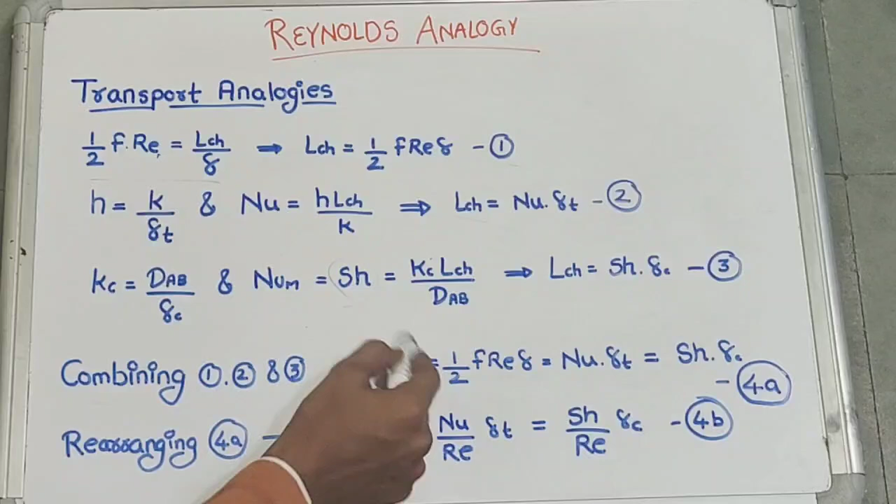We combine all three equations in terms of LCH and equate them. This gives equation 4a: LCH equals half into friction factor into Reynolds number into thickness, which equals Nusselt number into thickness, which further equals Sherwood number into thickness. Next, we rearrange by dividing the whole equation by Reynolds number.

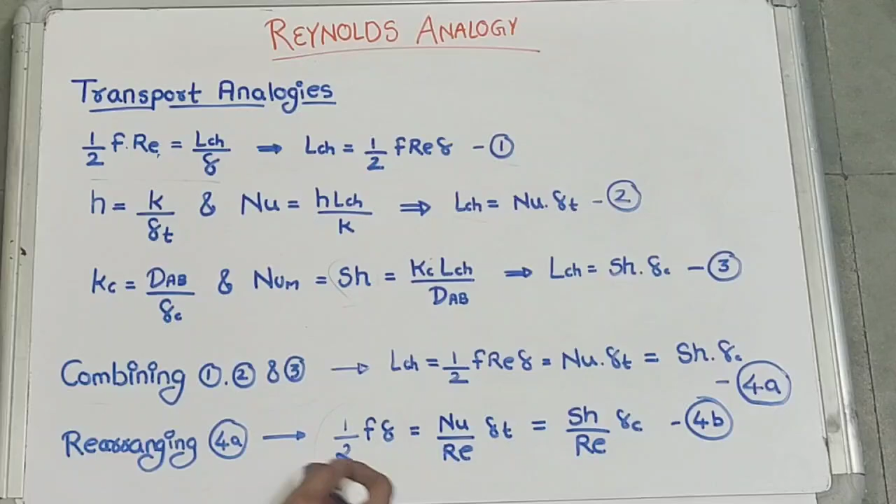Dividing by Reynolds number, it gets cancelled, so we are left with half into friction factor into delta. Similarly, we get Nu by Re delta T, and Sh by Re delta C. This will be our equation 4b.

Continuing further, we know equation 4b as already derived: half F delta equals Nu by Re delta T, which equals Sh by Re delta C.

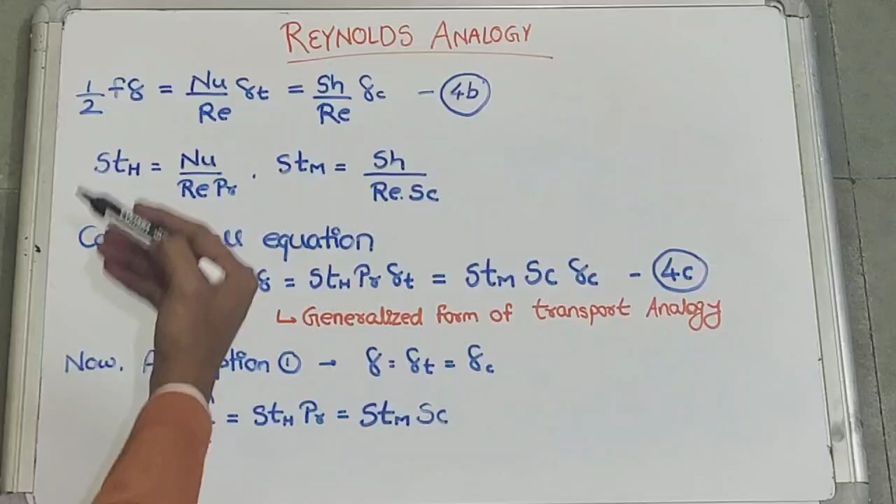Now we already know that Stanton number for heat transfer can be written in terms of other dimensionless numbers, that is Nusselt number, Reynolds number and Prandtl number. So it's written as Stanton number for heat transfer equals Nu by Re multiplied by Pr. Similarly, Stanton number for mass transfer can be written in terms of Sherwood number, Reynolds number and Schmidt number, as Sh by Re Sc.

Substituting these two equations in 4b and combining all equations, we get the final generalized form of transport analogy: half F delta equals Stanton number for heat transfer multiplied by Prandtl number multiplied by thickness, which equals Stanton number for mass transfer multiplied by Schmidt number multiplied by thickness. This is the generalized form of transport analogy.

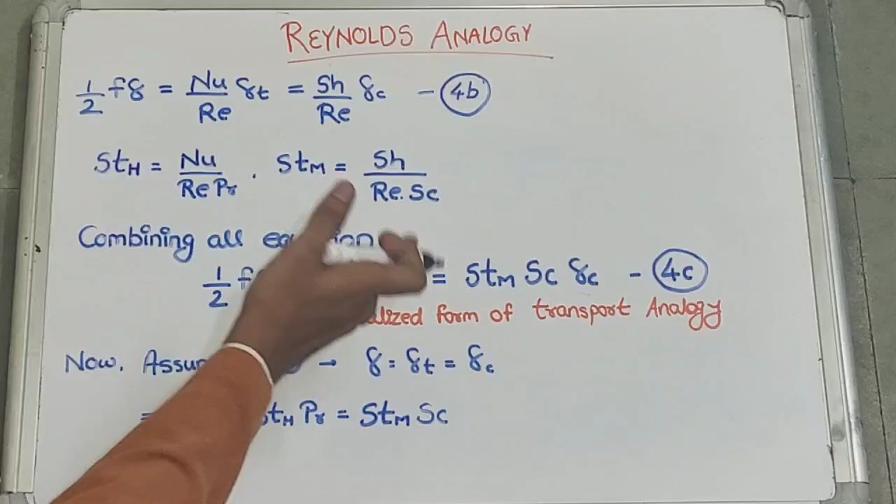Now, for further derivation of Reynolds analogy, we need to assume two conditions. The first assumption is that all the thicknesses should be considered equal, that is delta T and delta C should be equal. Substituting this assumption in equation 4c, all those terms get cancelled.

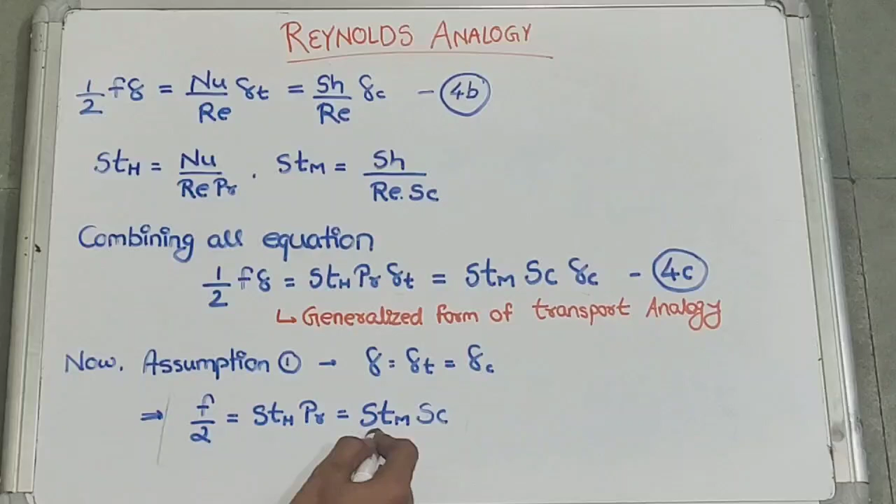Finally we get this equation: F by 2 equals Stanton number for heat transfer into Prandtl number, which equals Stanton number for mass transfer into Schmidt number.

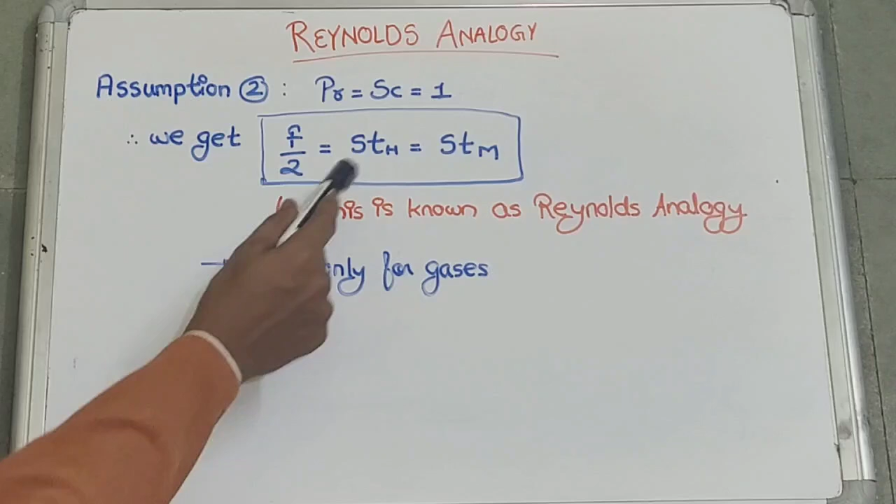After assumption 1, which considered all three thicknesses equal, assumption 2 is that we consider the dimensionless numbers to be equal, not all, but Prandtl number and Schmidt number, both considered equal and equal to 1. Substituting assumption 2 in the generalized form of transport analogy, we get: F by 2 equals Stanton number for heat transfer equals Stanton number for mass transfer.

So the generalized form of transport analogy reduces to three factors: friction factor, Stanton number for heat transfer, and Stanton number for mass transfer. This equation is known as Reynolds analogy, which we derived with the help of two assumptions. One thing to keep in mind is that this equation is valid only for gases.

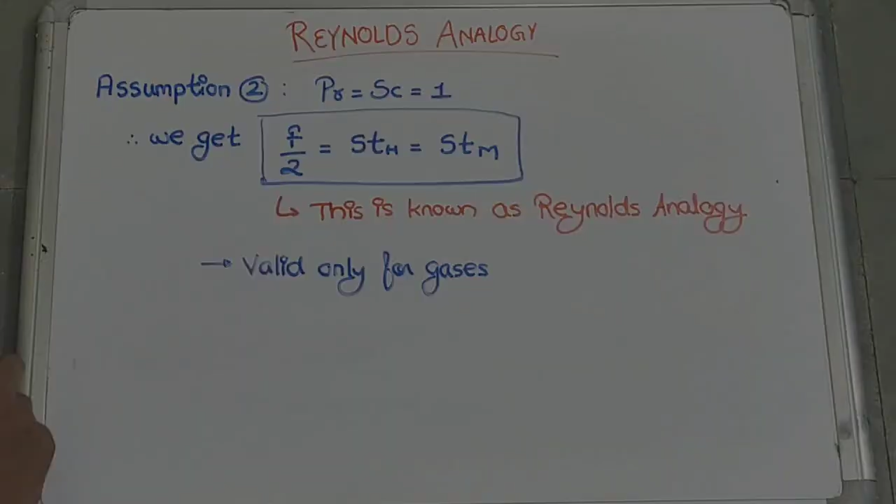I am sure you must have understood the derivation of Reynolds analogy. In a similar way, we will now derive the Chilton-Colburn analogy.

You are familiar with the generalized form of transport analogy, derived in the previous section: half into friction factor is equals to Stanton number for heat transfer multiplied by Prandtl number multiplied by thickness, which is equals to Stanton number for mass transfer multiplied by Schmidt number multiplied by thickness.

In the previous derivation of Reynolds analogy, we assumed all three thicknesses were equal, but here the assumption is different. Here we assume the thickness ratio delta by delta T equals Prandtl number to the power 1 by 3, and similarly the thickness ratio delta by delta C equals Schmidt number to the power 1 by 3.

If we substitute these values in the generalized form of transport analogy, we get F by 2 equals Stanton number for heat transfer multiplied by Prandtl number to the power 2 by 3, and this we denote as JH. Later you will know what is meant by JH.

Similarly, by substituting delta by delta C equals Sc to the power 1 by 3 in the generalized form equation, we get F by 2 equals Stanton number for mass transfer multiplied by Schmidt number to the power 2 by 3, denoted as Jm. Here JH and Jm are the Colburn J factors for heat and mass transfer.

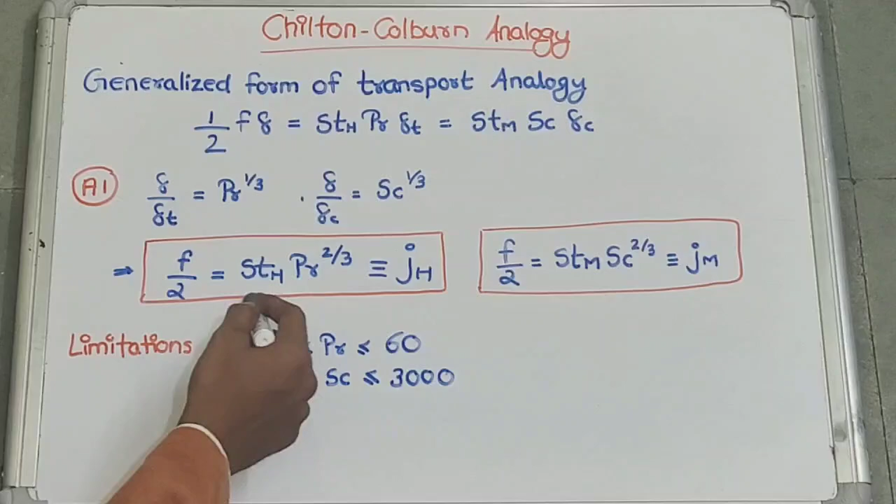This you have already studied in the first part of our podcast. The limitations of these two equations are that the range of Prandtl number should be between 0.6 to 60, and the range for Schmidt number should be between 0.6 to 3000. These are the limitations for Chilton-Colburn analogy, and these are the two equations.

After the derivation of Chilton-Colburn analogy, let's look at its geometric limitations. These are the four types of flow geometry given, and the corresponding Chilton-Colburn analogy. Let's look at them one by one.

First is flow over a flat plate. For flow over a flat plate, the Chilton-Colburn analogy is given as F by 2 is equals to JH is equals to Jm. You are already familiar with the J factors.

Next, the flow geometry is flow over a cylinder. For this, the Colburn factors JH and Jm are equal. Here the term F by 2 is neglected.

Third, flow over a sphere. We have the same relationship, that is JH equals Jm. But here we have two conditions: this will be true if and only if Nusselt number and Sherwood number are much greater than 2.

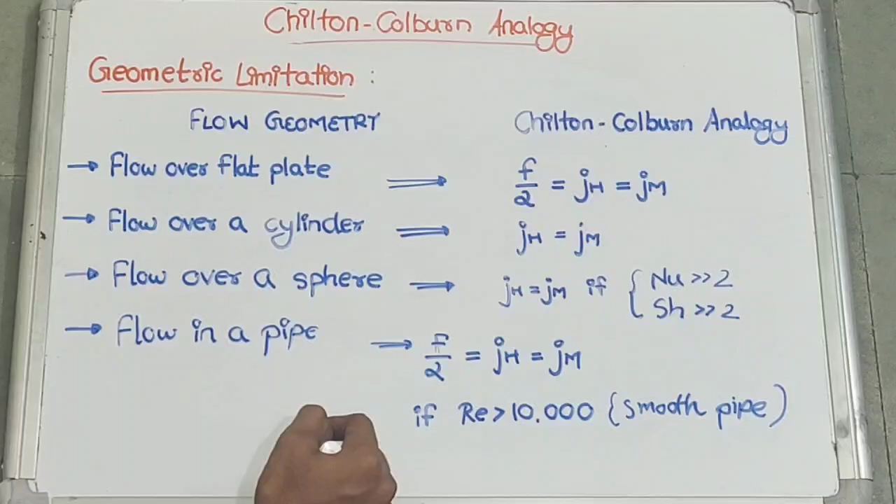The last flow geometry is flow in a pipe. For flow in a pipe, we have the same relation as flow over a flat plate, that is F by 2 equals JH equals Jm. But we have a condition: the Reynolds number should be greater than 10,000, that is for a smooth pipe. So this is the overall geometric limitation for Chilton-Colburn analogy.

Now let's move to the most important part of our podcast, that is solving problems. Any concept cannot be 100% understood if we don't solve problems related to it. So let's start solving problems.

You can see on my right side there is a problem. Let's first read it out. The problem states that air at 20 degrees Celsius flows through a smooth pipe whose diameter is given to be 0.1 meter at 10 meters per second. The pipe wall is maintained at 80 degrees centigrade and is coated with naphthalene which sublimates into the air.

Given air properties at 50 degrees centigrade film temperature: viscosity is 1.8 into 10 to the power minus 5 meter square per second, Prandtl number is 0.71. The naphthalene properties are given below: Schmidt number is 2.6 and diffusivity is 6.1 into 10 to the power minus 6 meter square per second. So this is the given data.

So what do we need to calculate?

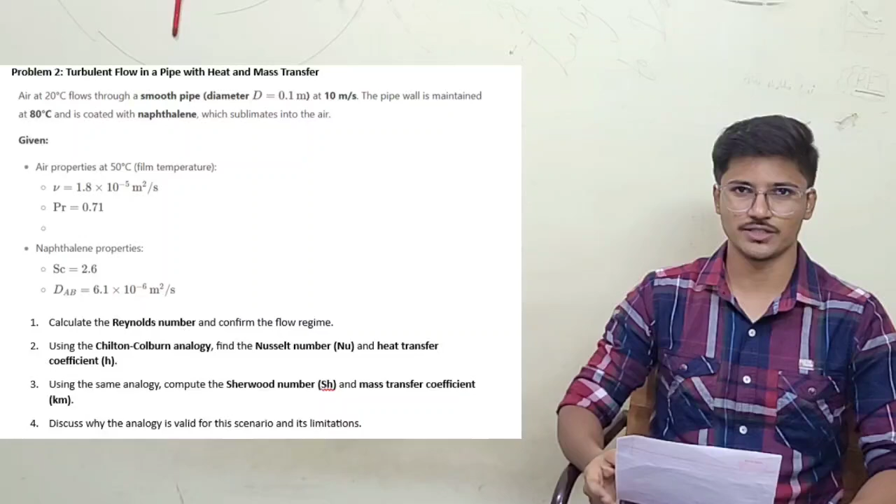In the first part, we need to calculate Reynolds number and flow regime. Flow regime is just stating whether it's turbulent, laminar, or transition flow. The B part is we need to use Chilton-Colburn analogy and find Nusselt number and heat transfer coefficient. The last part is to use the same analogy and compute Sherwood number and mass transfer coefficient. So this is the overall question, given the data and the things we need to calculate.

I am sure you must have understood what the problem is, what are the various doubts related to it, the given data, and the questions asked.

The first part of the question is to calculate Reynolds number. By this time you must be familiar with the formula: Reynolds number is given by Vd by nu, where V stands for velocity, d is diameter, and nu is kinematic viscosity. Velocity is given as 10 meter per second and diameter is 0.1 meter. Kinematic viscosity is given as 1.8 into 10 to the power minus 5 meter square per second. As Reynolds number is a dimensionless quantity, we get Reynolds number as 5.56 into 10 to the power 4.

This Reynolds number is less than 5 into 10 to the power 5, so we can conclude that it is laminar flow. So the first part of our question gets completed. The next part of the question is to find heat transfer coefficient.

For that we need Nusselt number, for that we need Stanton number, and then for that we need friction factor. So first we calculate friction factor for laminar flow using Reynolds number. The formula is F equals 1.328 into Reynolds number to the power minus 1 by 2, which is 1.328 into 5.56 into 10 to the power 4, whole to the power minus 1 by 2. After calculating, we get friction factor as 5.63 into 10 to the power minus 3.

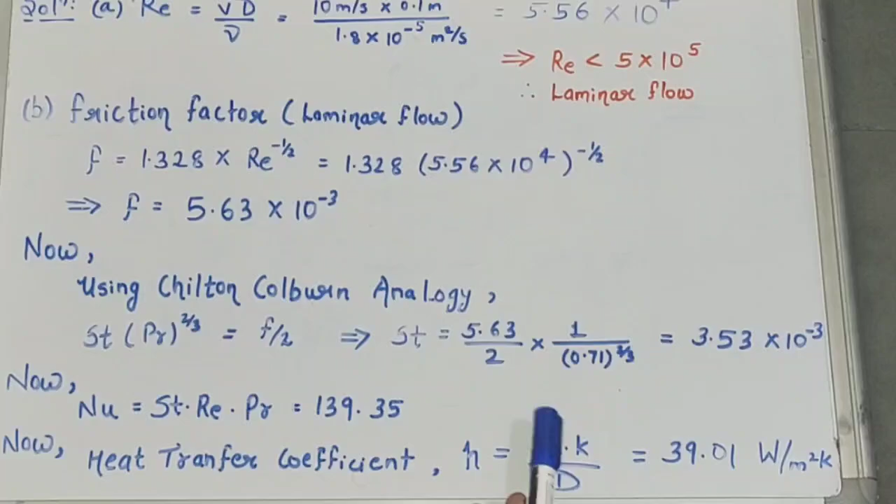So we have solved part A and part B of the question. Now let's proceed to part C. In part C, we need to find mass transfer coefficient. Let's go step by step.

First we need to use Chilton-Colburn analogy for mass transfer. From this we get Stanton number for mass transfer. The formula, as you are familiar with, is F by 2 equals Stanton number for mass transfer multiplied by Schmidt number to the power 2 by 3. Substituting the values of Schmidt number and friction factor, we get Stanton number for mass transfer as 1.48 into 10 to the power minus 3.

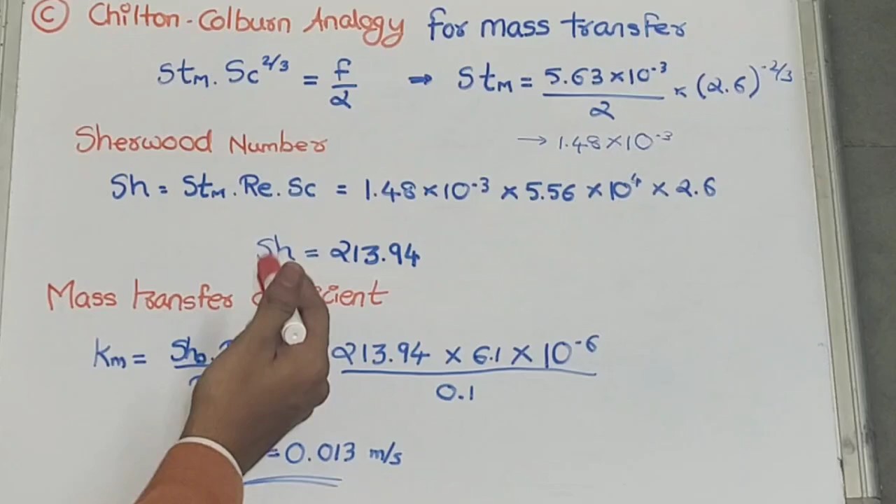Next we need Sherwood number. The formula for Sherwood number is Stanton number for mass transfer multiplied by Reynolds number multiplied by Schmidt number. Substituting all these values, we get Sherwood number as 213.94.

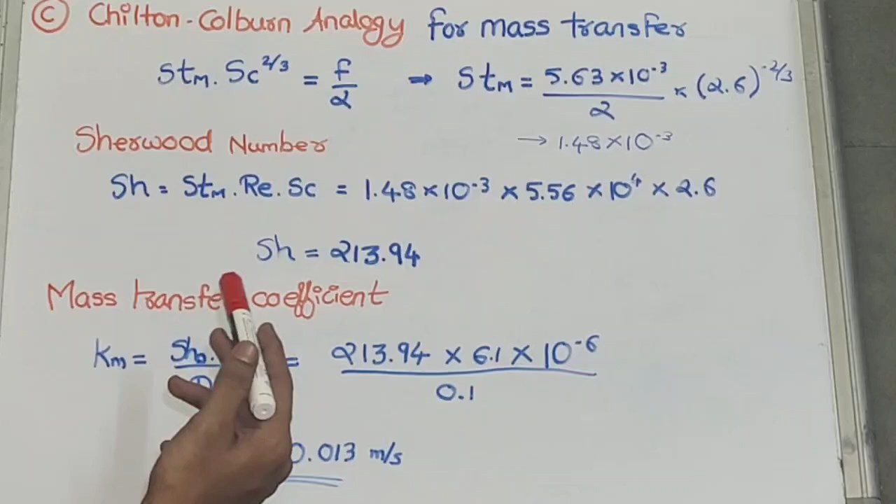Now this is the final step where we calculate mass transfer coefficient. To calculate it, we need Sherwood number, diffusion coefficient, and diameter. Sherwood number we just calculated as 213.94. Diffusion coefficient is given in the question as 6.1 into 10 to the power minus 6, and diameter is 0.1 meter. Substituting all the values, we get final mass transfer coefficient as 0.013, and the unit of mass transfer coefficient is meter per second.

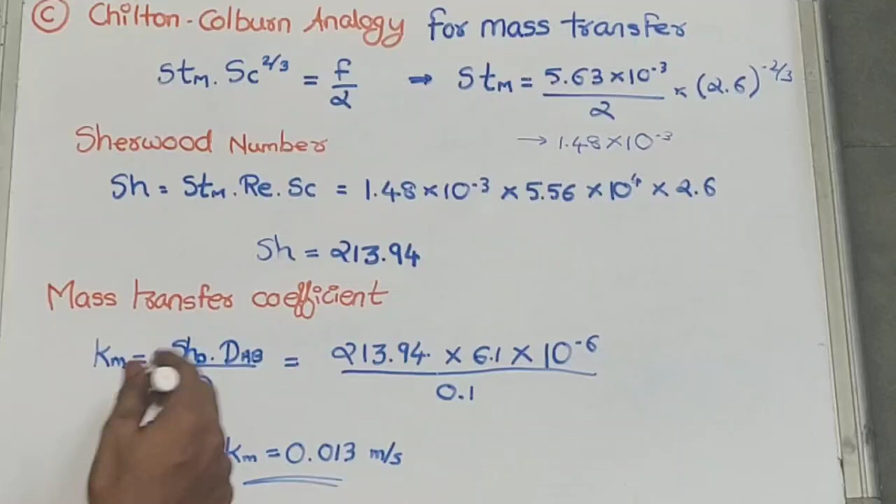So this is the overall solution of the question. Now, as we have seen in question 1, we calculated the Reynolds number and other related terms. Now we are going to see problem 3.

This problem is about a flat plate with variable wall temperature. The scenario is a 3 meter long flat plate exposed to engine oil at 30 degrees Celsius, flowing at 2 meter per second. The plate's temperature varies as T, a function of x, equal to 50 plus 20x, in degrees Celsius, where x is the distance from the leading edge.

The given parameters are: the oil properties at 40 degrees Celsius. The kinematic viscosity is given as 2.4 into 10 to the power minus 4 meter square per second, and the Prandtl number is given as 300.

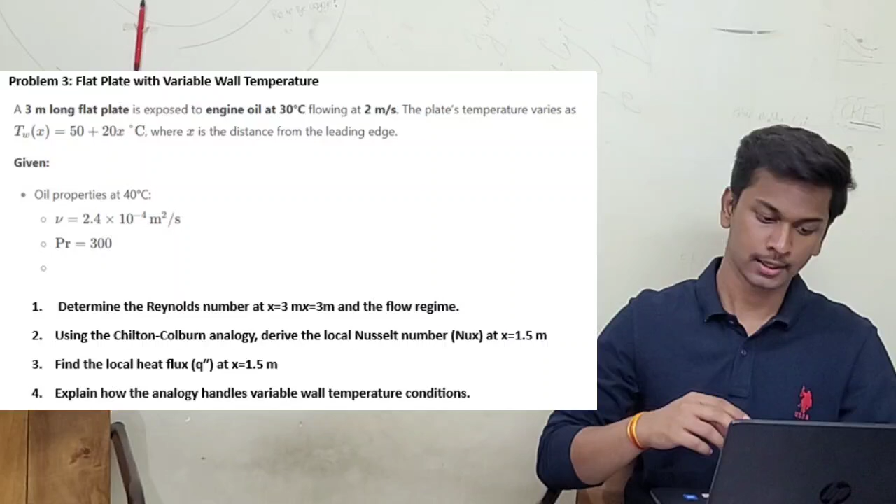There are 4 parts asked in this question. In the first part, we need to determine the Reynolds number at x equal to 3 meter and the flow regime, similar to what we calculated in part A of question 1.

Part B: using the Chilton-Colburn analogy, derive the local Nusselt number at x equal to 1.5 meter. Note, we have to calculate the local Nusselt number, not the average Nusselt number. Part C: find the local heat flux at x equal to 1.5 meter. Part D: explain how the analogy handles variable wall temperature conditions.

As we have understood the question and the doubts related to it, let's dive into the solution. Part A of the solution states that we need to find the Reynolds number at x equal to 3 meter and its flow regime.

As we are all familiar with the formula of Reynolds number, given as velocity into length divided by kinematic viscosity, all these terms are already given in the question. Velocity is 2 meter per second, length is 3 meter, and kinematic viscosity is 2.4 into 10 to the power minus 4 meter square per second.

After calculating all this, we get the Reynolds number as 25,000. Since this value is less than 5 into 10 to the power 5, the flow regime is laminar flow. So this is done for part A.

Next, we look at part B. Here we need to find the local Nusselt number using the Chilton-Colburn analogy. But first we need to find the Reynolds number at x equal to 1.5 meter, using the same formula as in part A: Reynolds number equals 2 into 1.5 divided by 2.4 into 10 to the power minus 4.

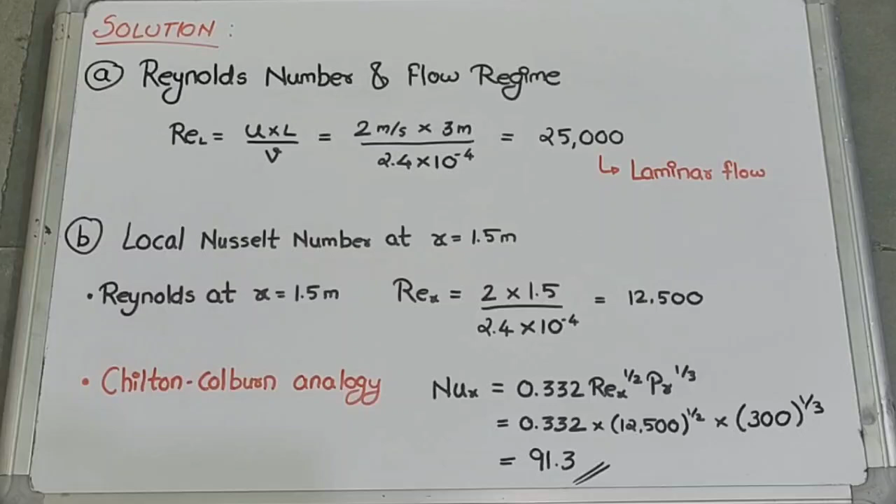Now after looking at part A and part B, let's solve part C. In part C, we need to find the local heat flux at x equal to 1.5 meter. So for finding heat flux, we first need to find the heat transfer coefficient, denoted by h of x.

This is given by Nusselt number into thermal conductivity divided by the distance, where distance is 1.5 meter, Nusselt number is 91.3, and thermal conductivity is 0.145. Substituting these values in the formula, we get the heat transfer coefficient as 8.83 watt per meter square Kelvin.

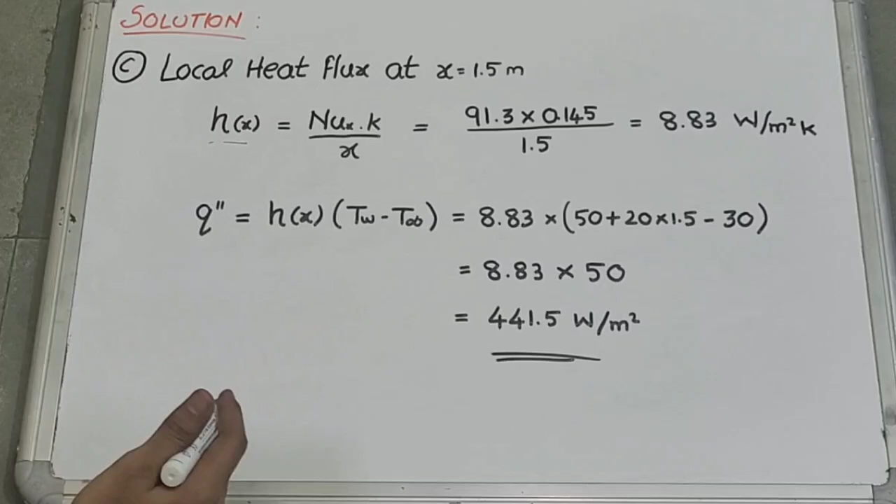Now, to find the local heat flux, we use the formula: heat transfer coefficient into Tw minus T infinity. Tw is given as 50 plus 20x, which varies with distance x, but here we need the value at x equal to 1.5. So we substitute that value: 50 plus 20 into 1.5. T infinity is given as 30 degrees centigrade.

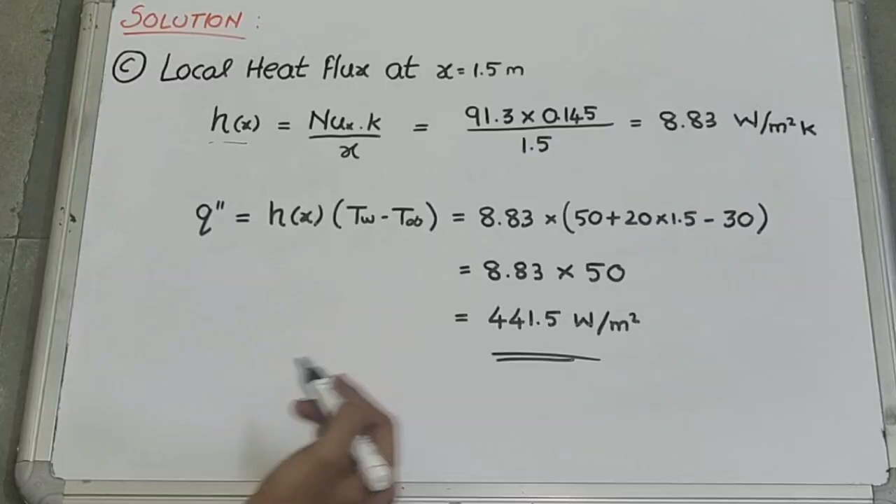So we substitute all these values and get the local heat flux at x equal to 1.5 meter as 441.5 watt per meter square.